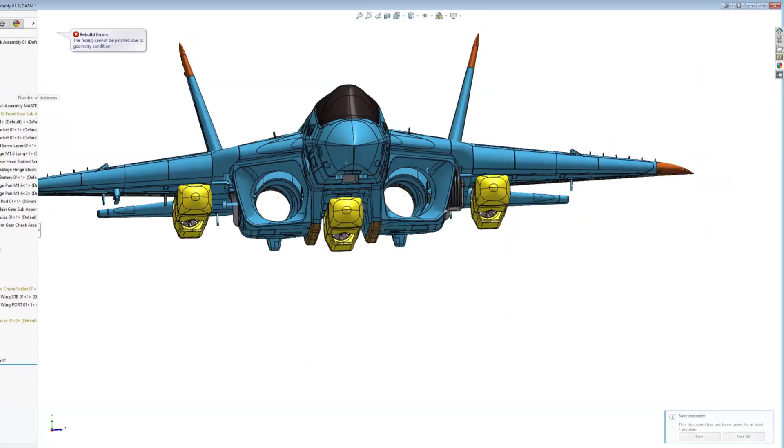For the next bigger version of our JRM-01 with 2 70mm EDF, we thought about a nice gimmick. Mark already constructed something like a cruise missile for his Tornado, and we think this could also be a nice RC airplane, a miniature one, so let's see how this will work.

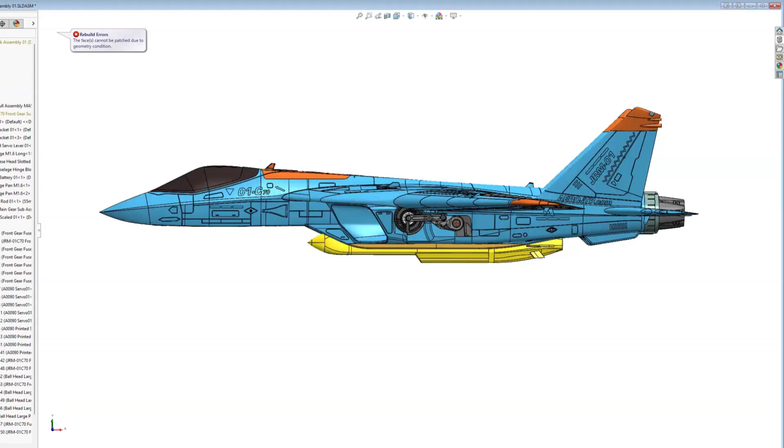At first we put it to the correct size, so that it fits just between the two skids of the JRM-01. And then we modeled a nice NACA inlet, because this one won't have a rocket engine, it will have a small EDF, a 30mm one. Just the right amount of air for the EDF is very important.

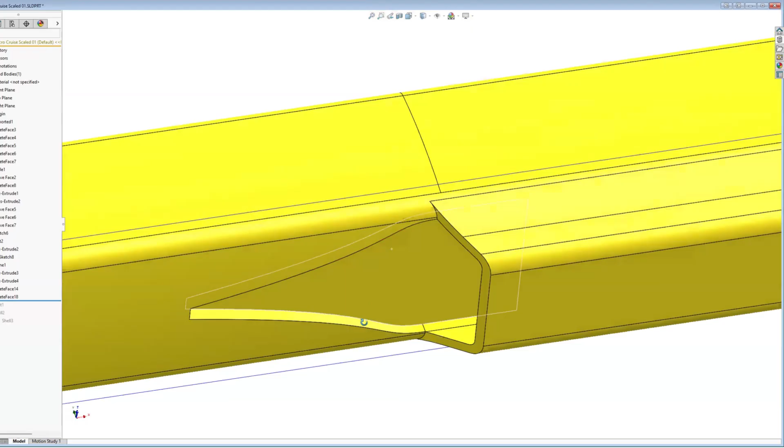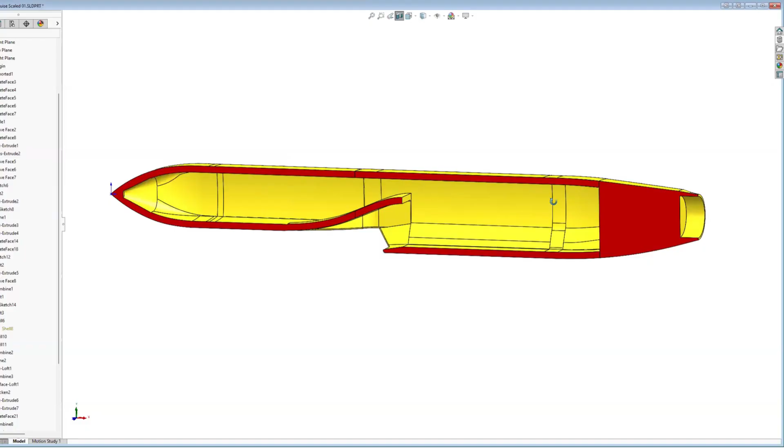And right after the inlet was shaped, it was time to bring the NACA inlet into its third dimension. So we go into the fuselage and shaped a nice curve. As you can see here, we made it as big as possible, just so high that there will be enough room for the wings, which will be constructed later on. And then we make the whole body hollow, except the tail, which will be adapted now for our EDF.

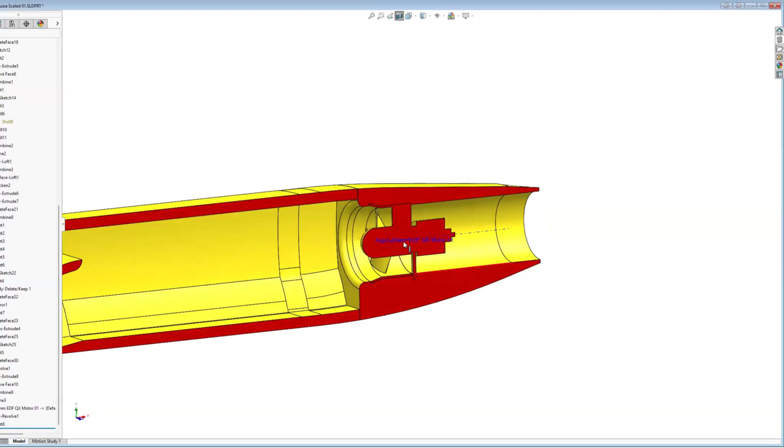This is a 30mm 6-blade EDF, which will give around 200 to 300 grams of thrust. The main focus while integrating the EDF was also to take care that there won't be any vortices right in front of the EDF, so we made all curves nice and round.

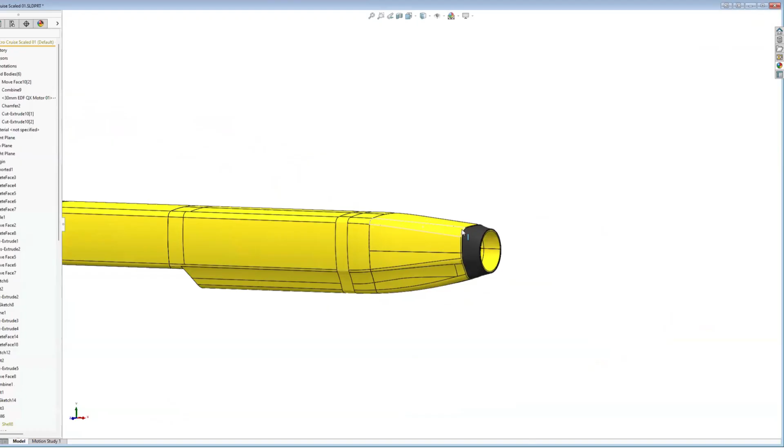Next we put the wire cable channel into it and also added 2 magnets. It should be very easy to install or change the EDF, so just with 2 magnets and this round ring on the tail, it will be possible this time. After a last check, we were quite happy with the installation of the engine. Also the aerodynamics will work fine, and so we can go over to the next step, and this will be

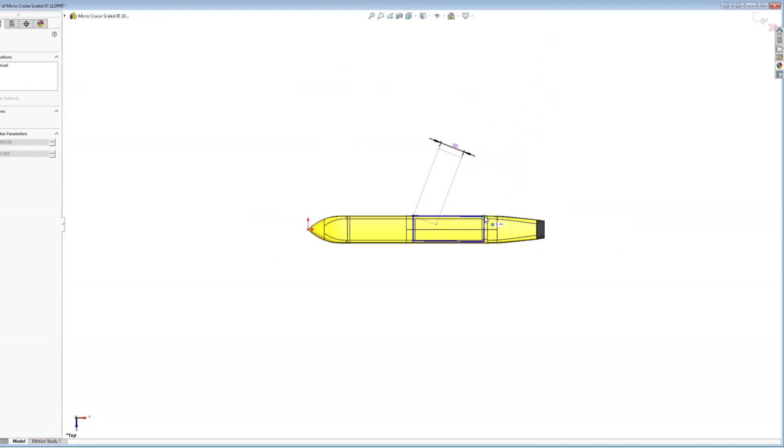the foldable wings. And here at first we have to figure out the correct size, because on the original cruiser these wings are so small this won't work in RC size. So our focus was to make them as big as possible to generate maximum lift. And at first we moved the rotation point of the wing more and more forward, so that the wing span becomes longer and longer.

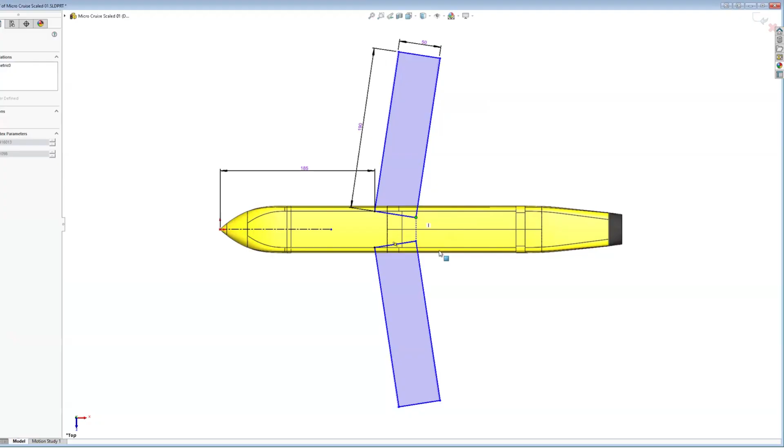We also moved at the rear as close as possible to the motor, but you can see here 50mm as depth of the wing. This is super small. Another idea to increase the wing area was to put the rotation point to the maximum outside of the fuselage. And here you can see our first wing design.

They are just the right size that they will fit into the micro cruiser. Also they have the right height that they don't collide with the NACA inlet. It is super close, everything inside. Above the wings a top cover was also necessary to stabilize and reinforce the whole fuselage construction.

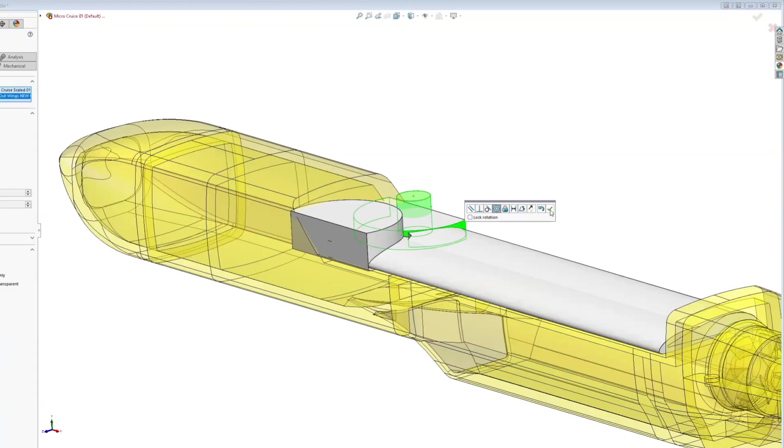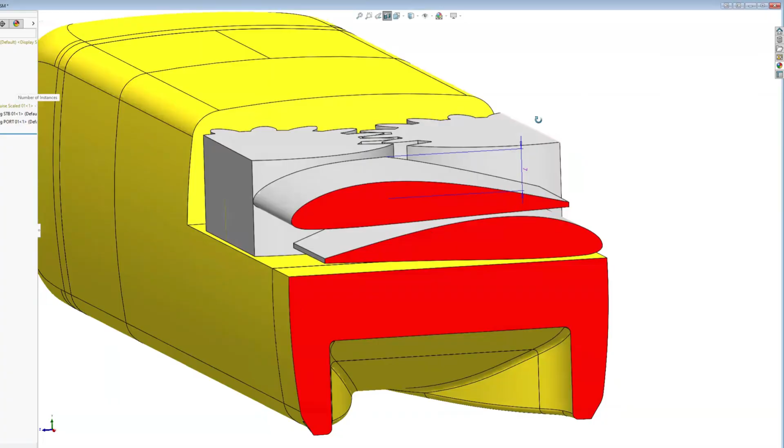So they were put a little bit deeper, and they also have to be coupled, because when they are folding and unfolding, they need to have the same position. So a gear with some big teeth was shaped into the root of the wing. And when this works, like here in the animation, we would be super happy. And you can see here the wings are packed super close above each other.

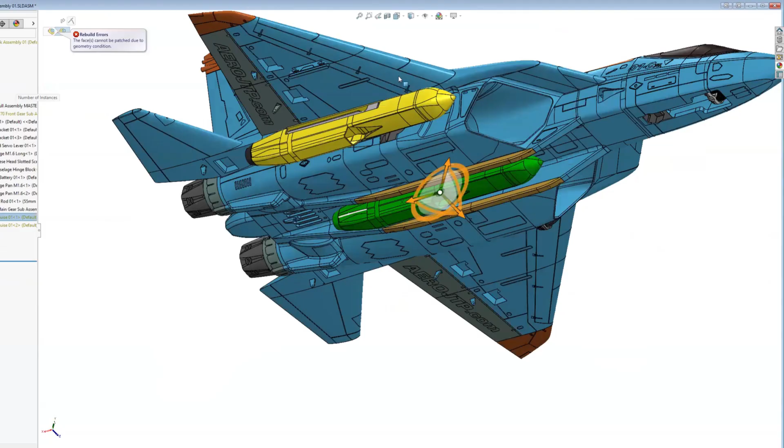After designing the wings and including the engine, the biggest steps were made. So it was time to put these micro cruisers on the JRM1. At first we had the idea to put it just between the skids on the main fuselage, but this next jet will be so big that I think there will also be enough power to put 2 extra ones onto the wing. So we looked for a nice location.

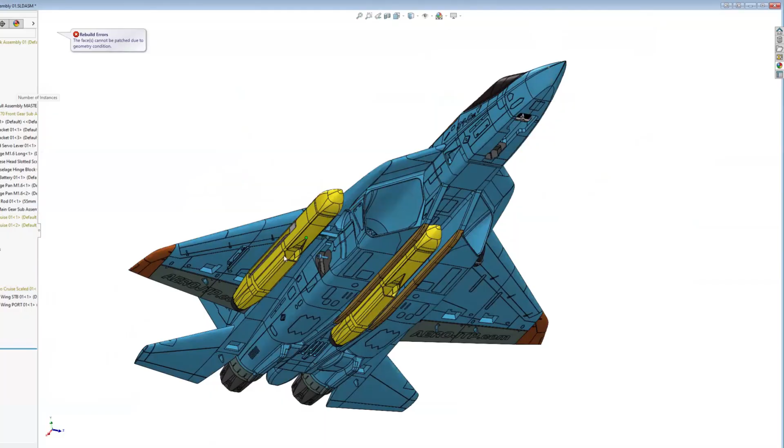At first we put them quite far outside, but they could block the ailerons. So afterwards we will move them a little bit more to the inside. Also when you drop one off, we don't want to have any instabilities or problems flying the jet, so it makes sense when these cruisers are moved more to the inside, like you can see here.

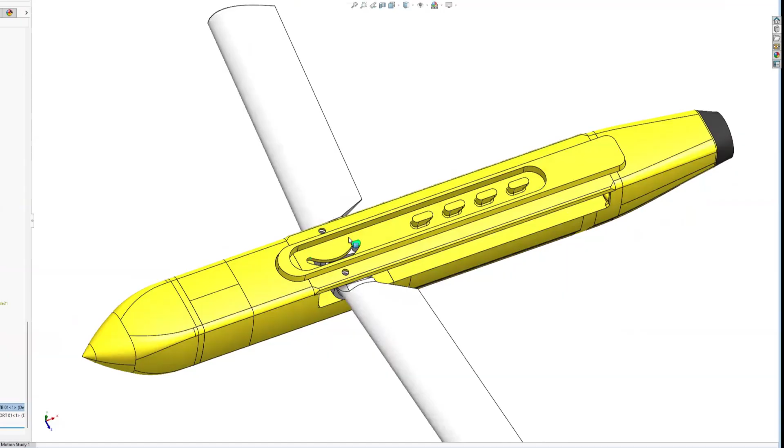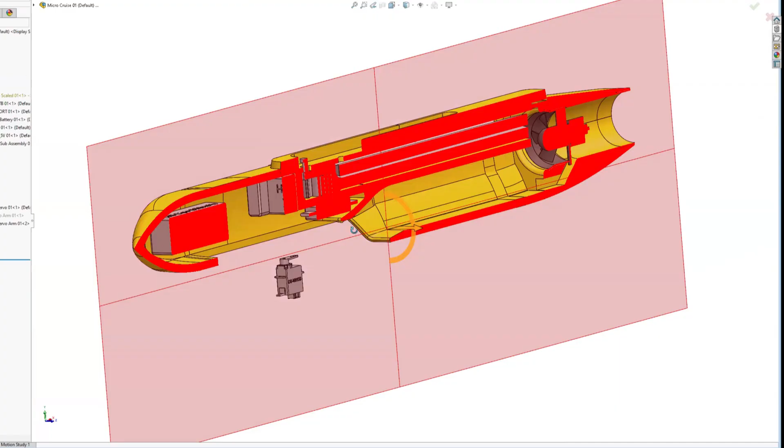But there was still a lot more technique and electronics needed, so we shaped a battery, a receiver and also a small ESC to see if everything will fit in the super miniature fuselage and to see how close everything is. But in the end it fits. One of the biggest concerns was how to control these micro cruisers in flight.

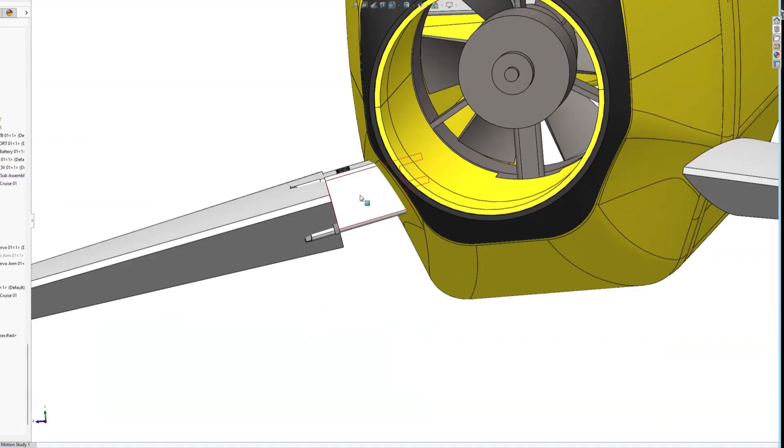The idea was to use some ailerons. So these big horizontal stabilizers will work as elevator and ailerons, but they also need some servos, and this time we want to drive them direct. So these ailerons will be put directly onto the servo, but everything also had to fit again with the fuselage of the JRM-1, because the skids shouldn't entangle with these horizontal stabilizers, so they were angled downward.

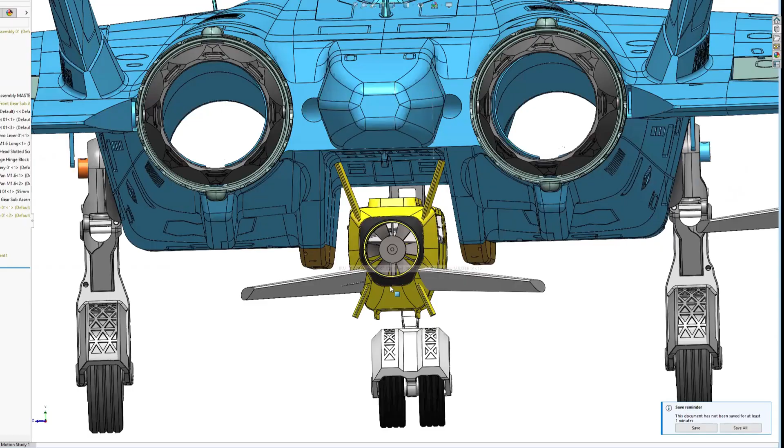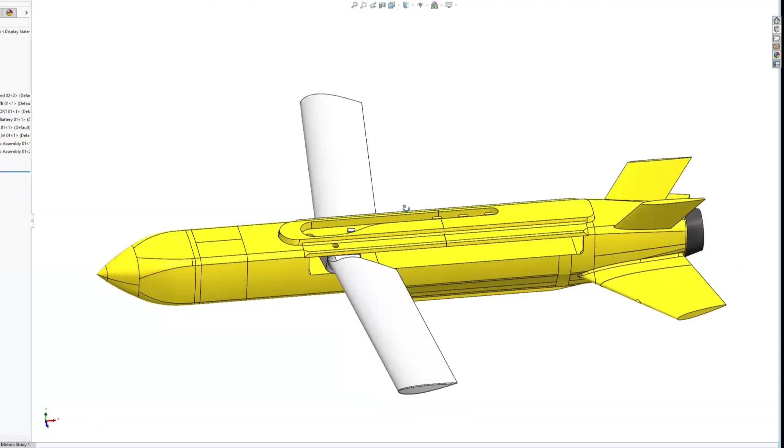But you can see here everything fits perfectly at the end, and after the horizontal stabs it was time for the vertical stab, and again everything was super close, so we had to divide them into upper and lower ones. And finally we found a perfect position for the servo. It will fit close to the ducting of the EDF, and of course it will be removable if needed with 2 screws. So a lot of steps were done, and after the flight control was installed, it was time for the release mechanism of the wings.

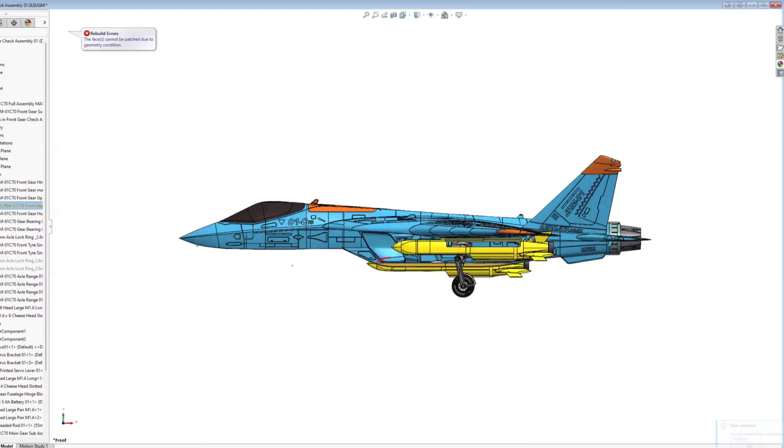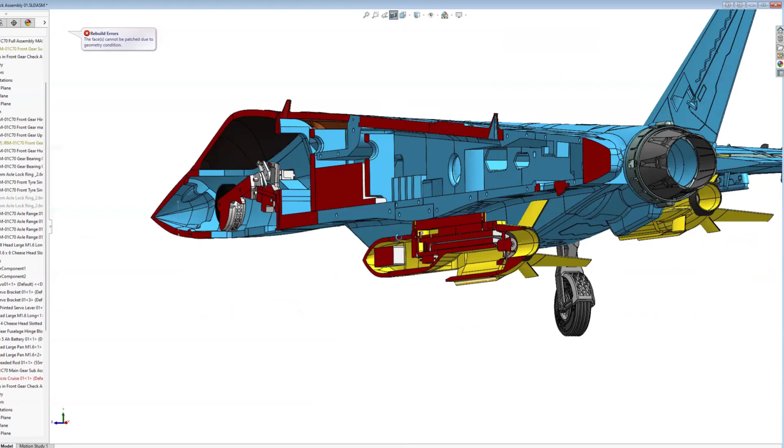There we just use one servo, and this servo arm will grab into the upper wing and block it from unfolding. As this was also done, we thought about a release mechanism for the whole microcruise. This is our first idea for the pylon. This pylon will be bonded or fixed to the fuselage with some bowdens, which go through 2 attachment points at the front and the rear. The whole microcruise should be releasable from the TX. And here we got it, the drop-off servo with the 2 bowdens. This will be installed in the pylon to release the microcruise.

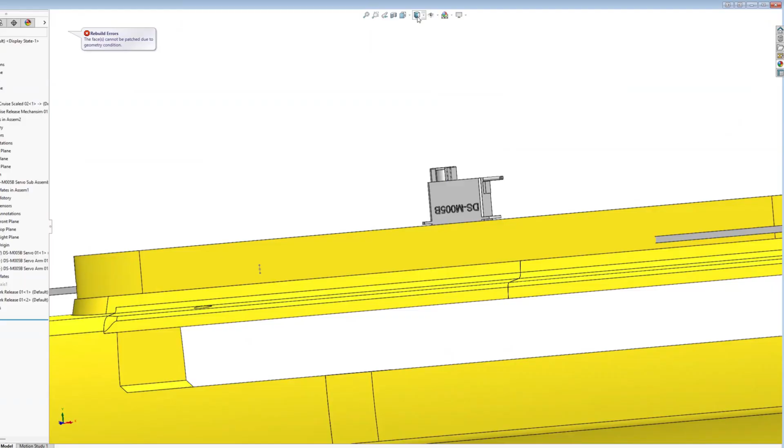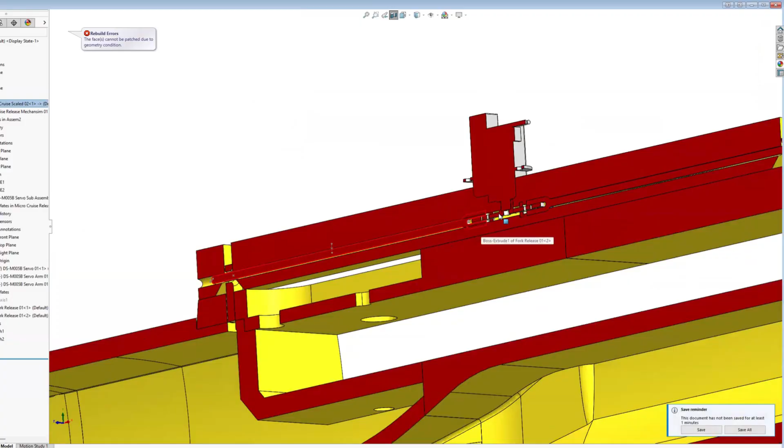And we want to make sure that the servo has enough power that under all circumstances, let's say a lot of air pressure or some G-forces there could always be on this jet, there will be a super safe release. So we get close to the rotation point for a very good momentum, and here you can see how the bowdens will move. Everything you see here will be 3D printed, of course, except the servo, but also the bowdens, so that it will be very easy to install and to build.

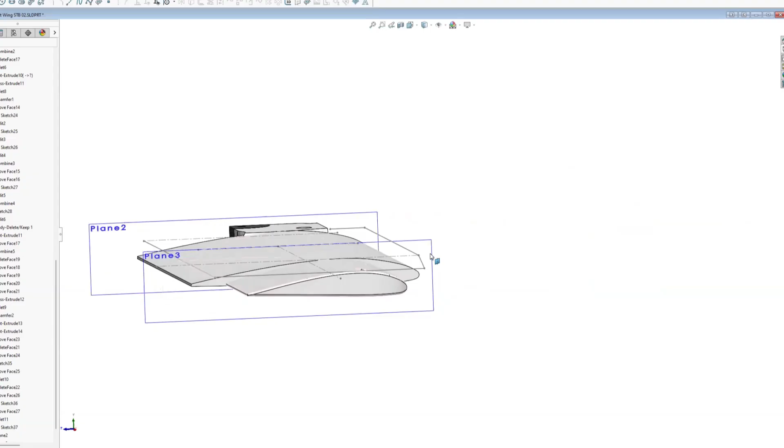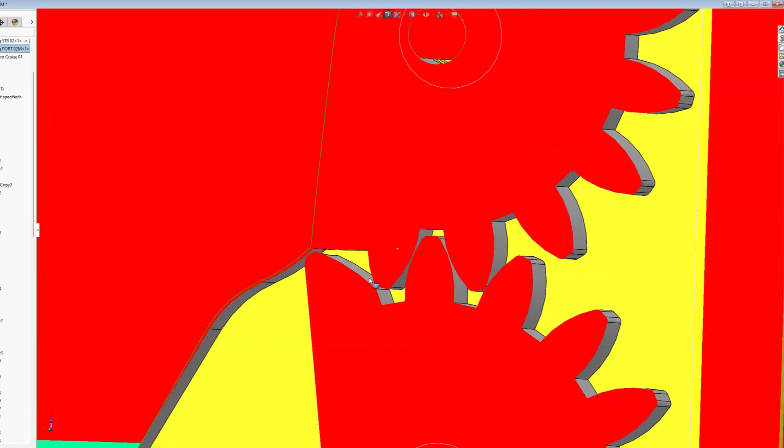We still had some concerns whether the small wings will generate enough lift. So to be prepared for the maiden, we designed a bigger one with a bigger wing chord, and also tested some different designs here with a step outside of the wing. But at the end we decided on a very simple design, like the first wing, just with a bigger chord. All details have to be checked right before printing, but till now we are super happy and we look forward to the first print. So let's go. First microcruise is getting printed.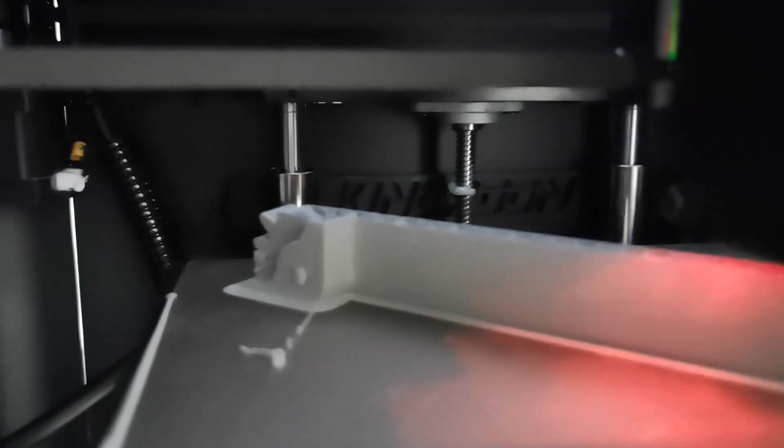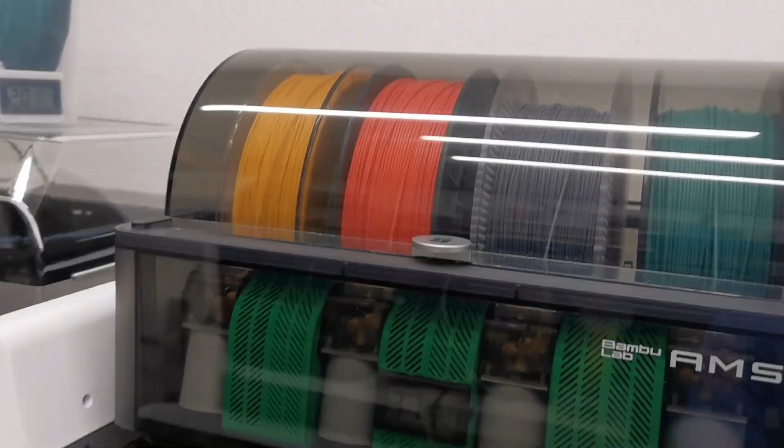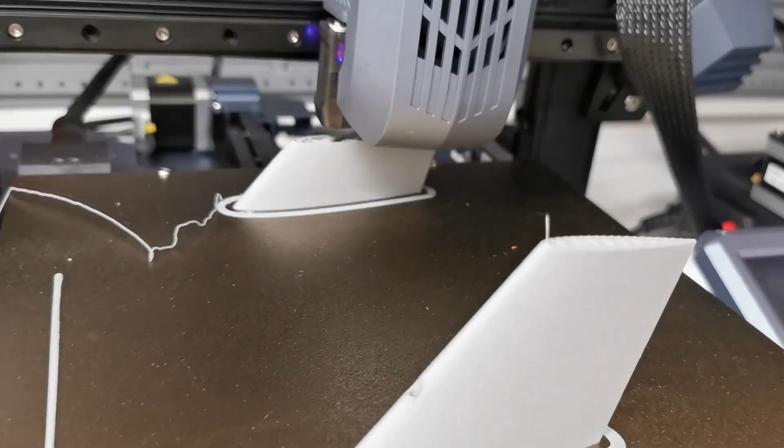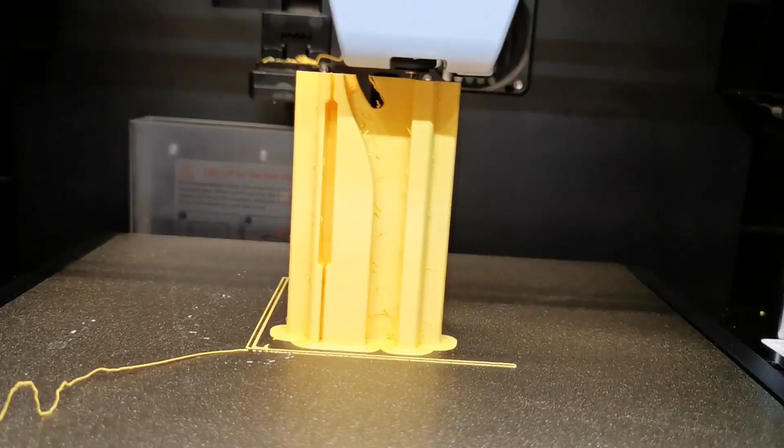Here we got the wing on its nose, and the Bambu Lab is printing the nose in yellow from colorFabb. And here we got some other parts on the end. This is the lower cover, and these are the ailerons, and this will be a big fuselage section. And last but not least, on the KD Pro, it's also a fuselage part. I think the top cover, yes, will be the top cover. And the next prints are getting ready.

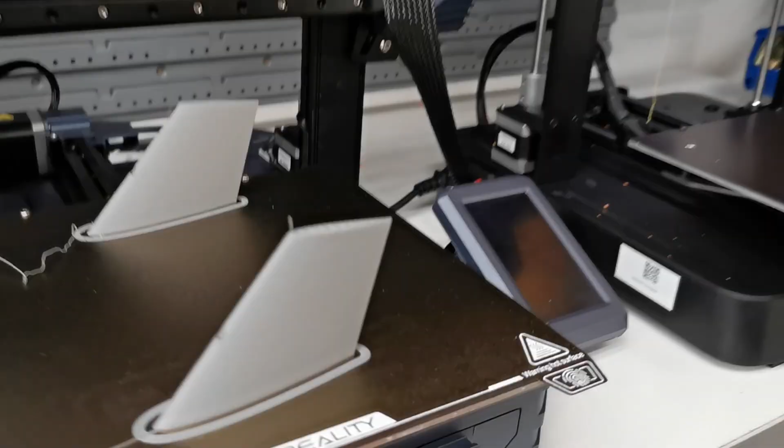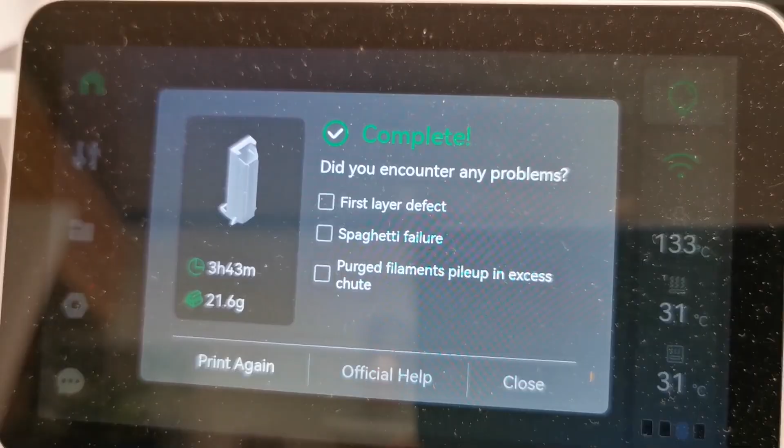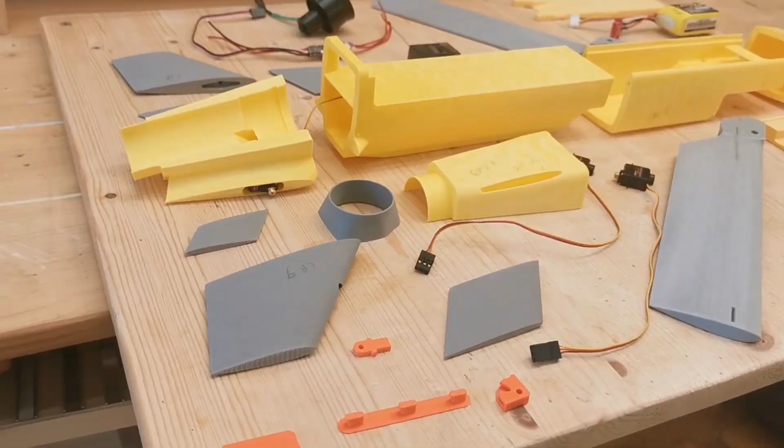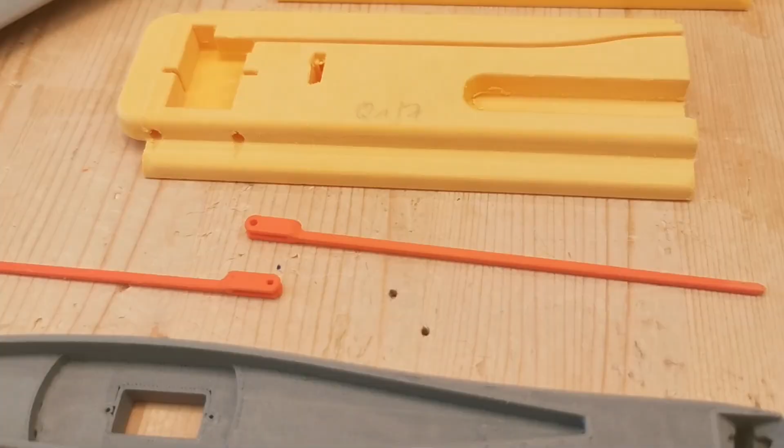Stabilizers, they look quite good. And the Bambu Lab is starting the next part. The wing is also growing on the KLP. And the Bambu Lab just finished the biggest part of the mini cruise, also printed with yellow colorFabb. Looks amazing. First mini cruise is printed, and here we can see it, the removable wings, and this is the release mechanism. We printed these bowdens completely with some forkheads.

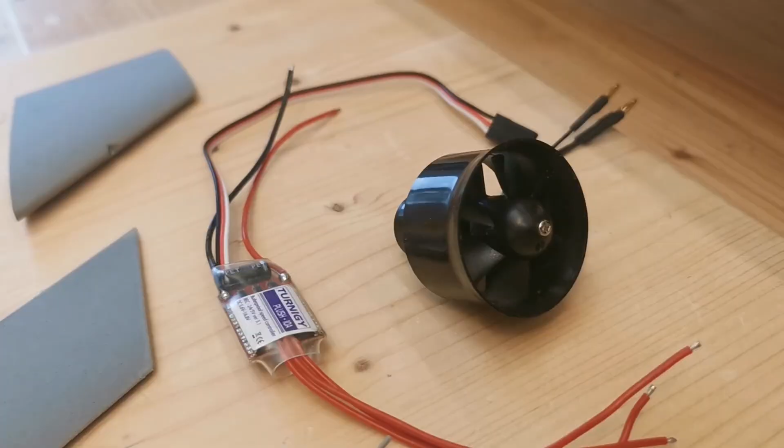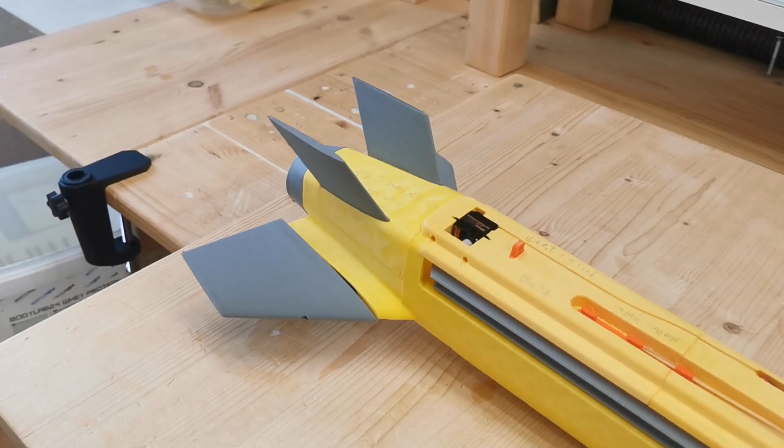We got the battery. This will be a 3S 850 milliamps and the well-known 30mm EDF, the receiver, minimum 4 channels are required, and the ESC. I would say, let's assemble. The first micro cruise is built, and let's see how it works. For steering there are just 2 servos needed. We got ailerons that work as elevators and ailerons, and of course the wing release mechanism.

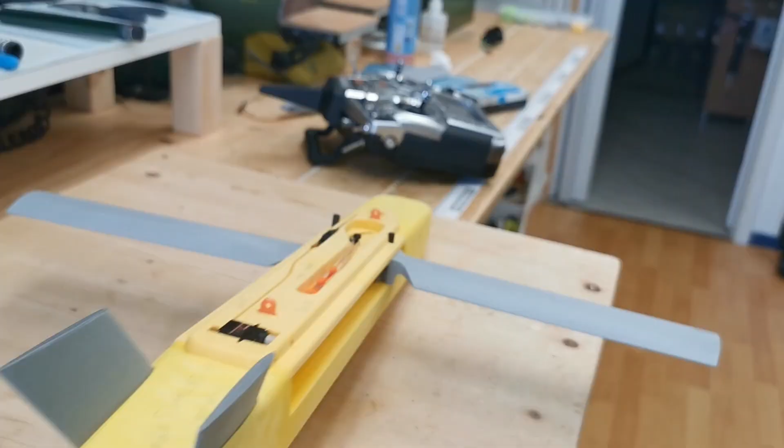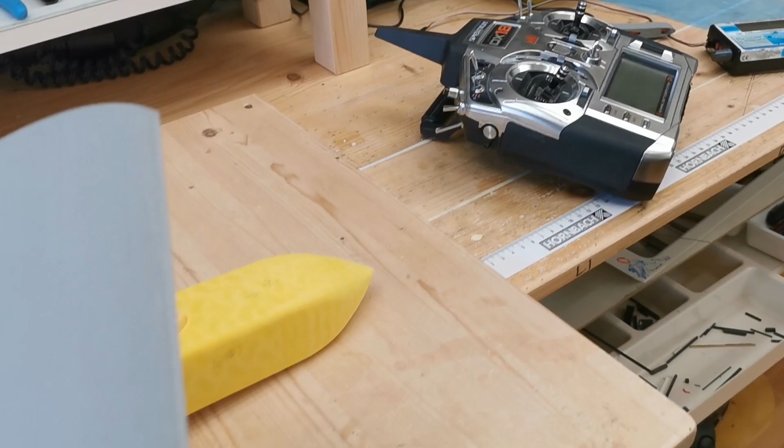You can see it. This one is a pure glider, so there is no engine installed. This will just be for releasing in the air and then gliding down. And the second version is printed at the moment, and this will have some bigger wings, as we can see here. This will also have some engine installed.

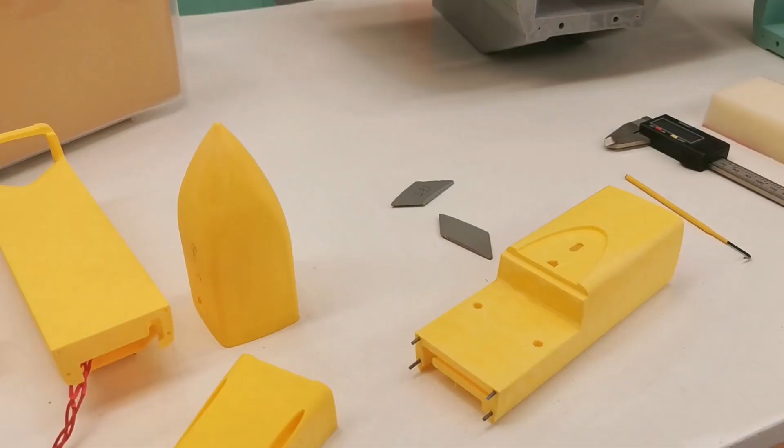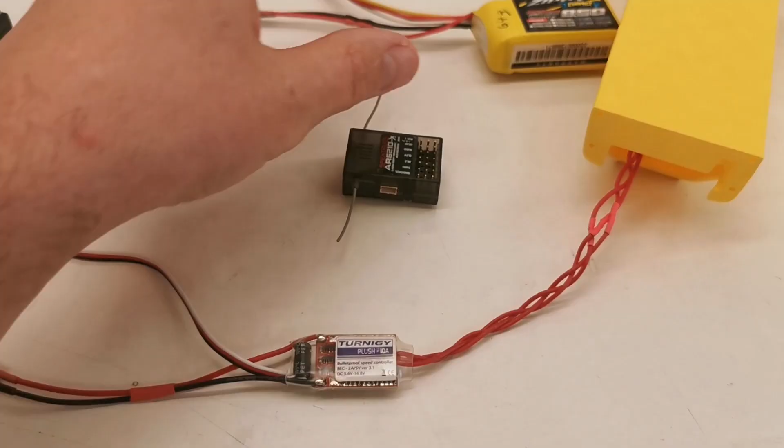Here are the first parts for the new one. And where's the engine? Here it is. A 30mm EDF will be used, and of course some small ESC and a 3S battery with 850 milliamps, and this will be the jet where the whole thing will be mounted, just in between underneath the fuselage.

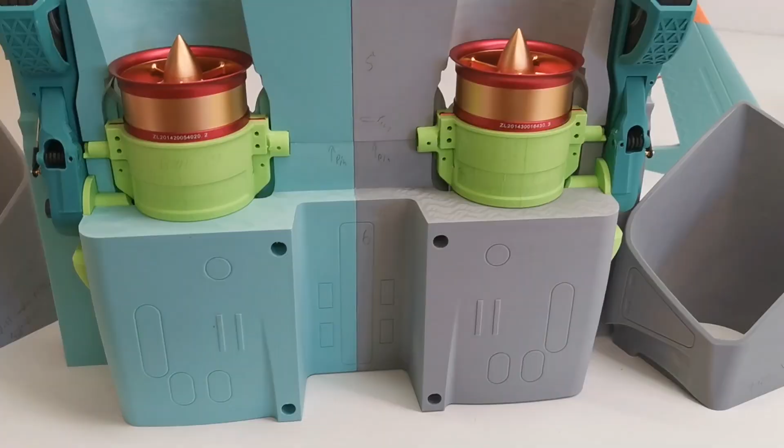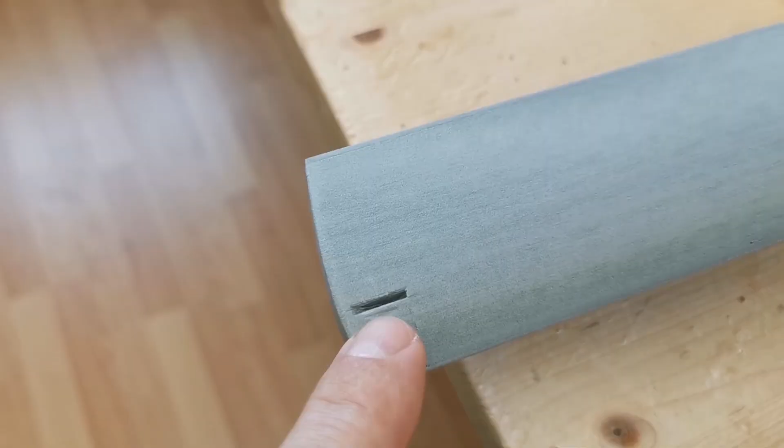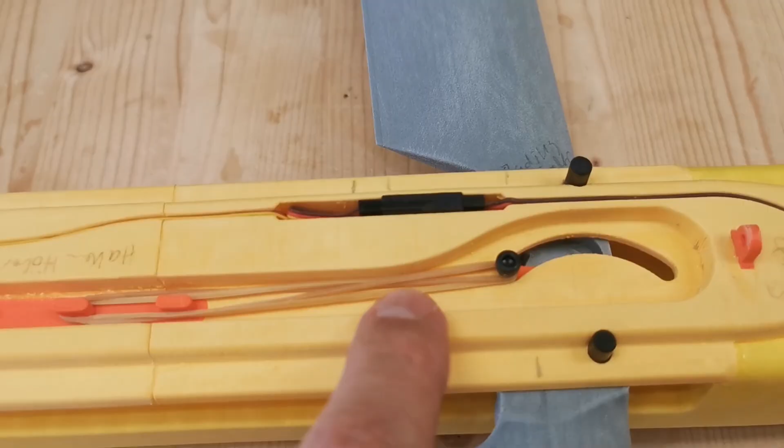So let's take a closer look at the technique. Here we can see the release servo. This will just go in here with a servo arm and lock the wings in the folded position. And the whole folding is done by these rubber bands, just normal household rubber bands. And both wings are coupled with this gear, so they always move together like this.

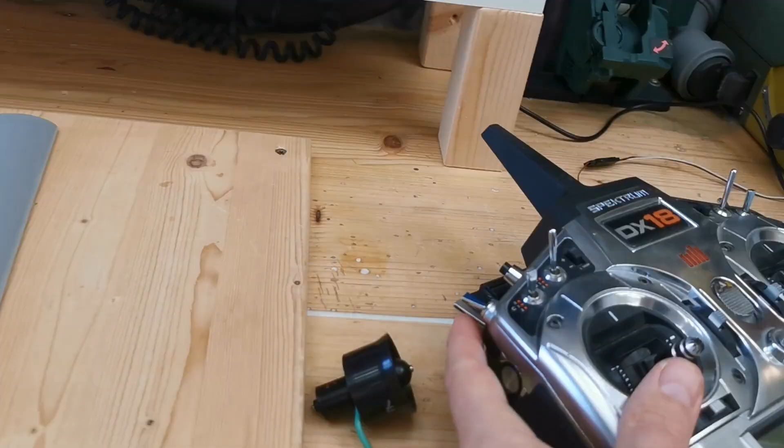And when they are put in, switch the servo, I got it here just on this switch, and when the Micro Cruise is released from the jet, I also release the wings and it will start gliding. Here we can see the servo. This is just what happens. Servo arm for locking and for releasing.

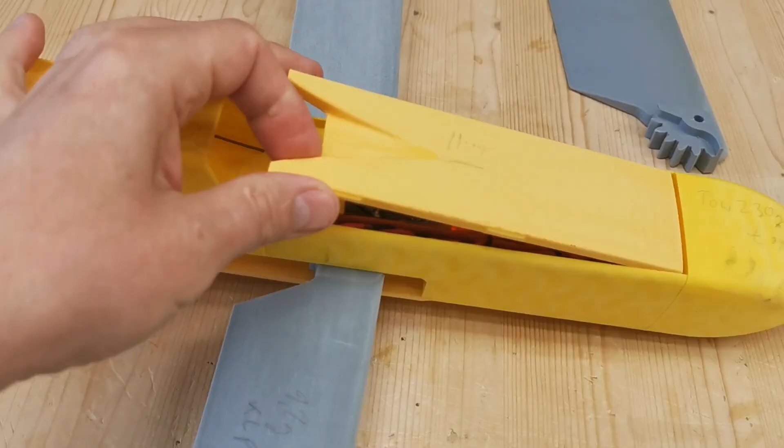Now let's turn it upside down and take a look inside. For opening the hatch, just grab under here and you can see all the technique. This is the BEC. It's quite too big for this one, but I just got this big one, and the receiver is also much too big, so you can save a lot of weight.

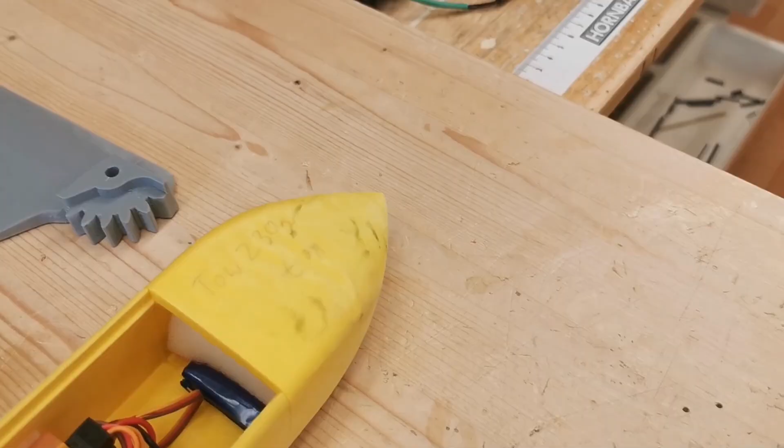A 2S 300 milliamp LiPo is inside, and also a little bit of lead to keep the CG. CG will be around here, just a little bit in front of the end of this edge. And there we can see the wiring. That's the first prototype. On the next prototype there are many improvements, so let's take a look at the release mechanism. That's the release mechanism.

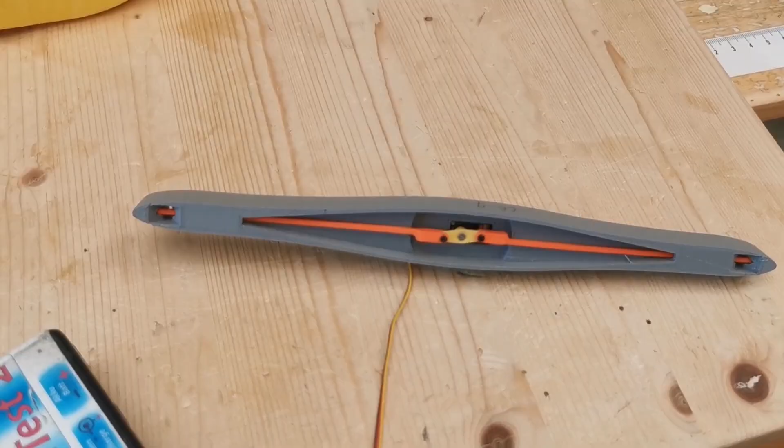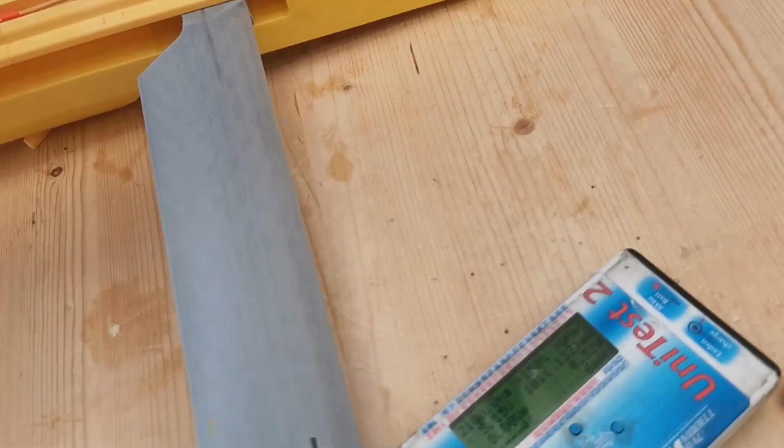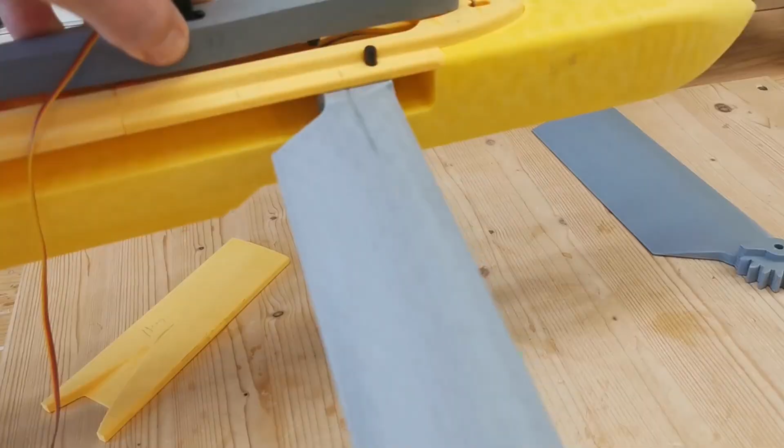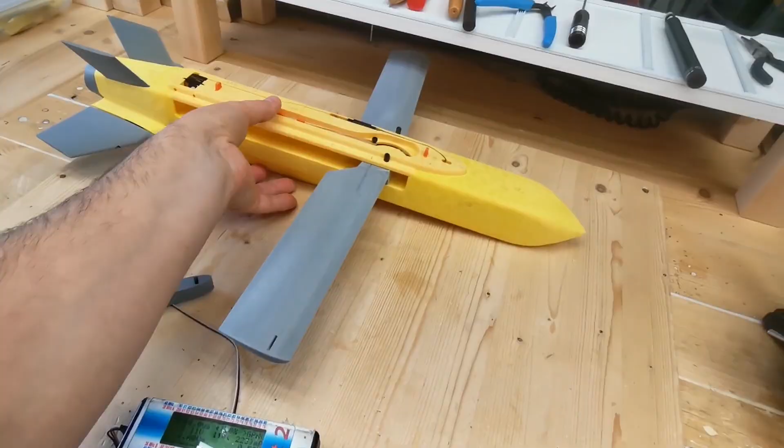This part will be attached to the jet, to the airplane, underneath the fuselage or the wing, and then just put it on top, 2 holders, and now it's attached. Let's see if the release works. So released, and then the wing opens up and this thing can glide down to the ground.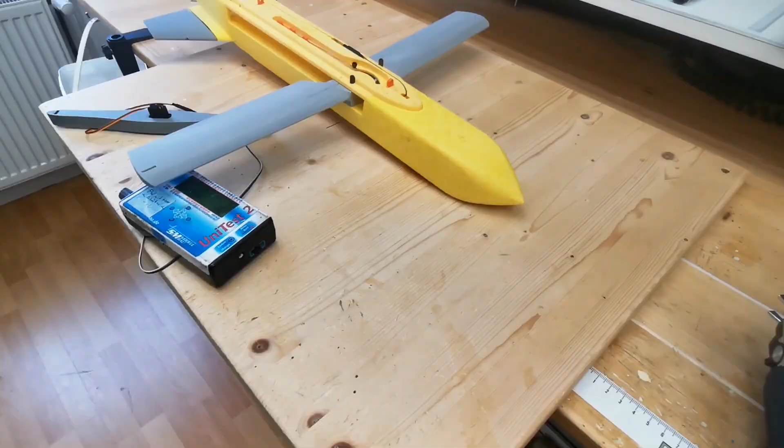Very nice one. The flying weight of this one is at the moment 230 grams, but I think 200 grams or even under 200 grams is absolutely possible. This is just a prototype where a lot of weight can be saved. Also the next one has a little bit longer nose, so that there is a much better momentum for the battery. And one specialty is the ailerons are mounted directly on the servos.

So we can see there is no linkage. It's directly on the servo, and we got very big movements. So I think this will fly very nicely. No linkage at all. Very clean build, and also super lightweight. All the wires here on the top and the other wires.

Yeah, on this first launch there was just not enough power to reach the minimum airspeed, but on the second try everything went well, and this thing was just flying wonderfully, even with the super small size. Yeah, it was absolutely not easy to film this small bird, but it flies much more easily than I thought.

I think also the gyro did a great job, because on this day it was really windy and there were a lot of gusts just behind these trees you can see there. But it was super easy to fly and there was no stall tendency when you fly some turns or whatever. Just the power was not as much as I hoped for.

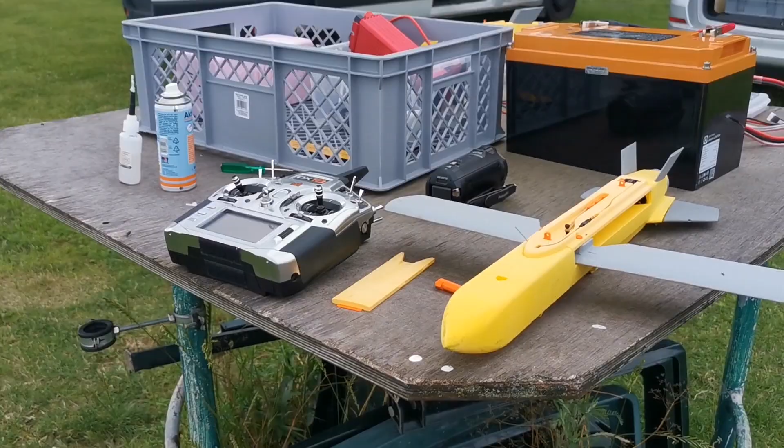So there will also be a next version built with a multi-blade prop, which I will show in the next video. But also with the small EDF, it was nice to fly and it looks super great. And I'm super looking forward to installing it on the JRM and releasing it from high above in the air. First flight of the Mini Glide successfully ended.

Battery just recharging. The next version, which is powered by a multi-blade prop, is already in the making. It is also possible to carry some FPV equipment like this front camera or a camera underneath.